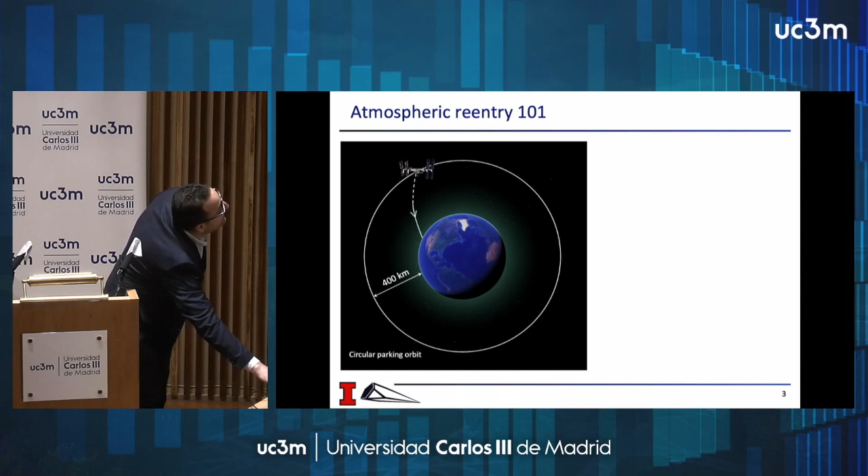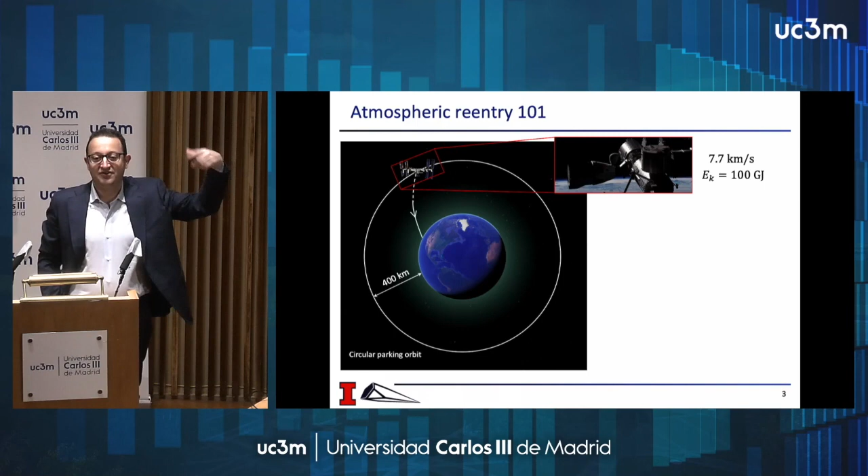So we start from here, right? From the International Space Station, at about 400 kilometers altitude above the surface of the Earth. And we have a system in orbit. Imagine that this orbits at the first cosmic velocity, 7.7 kilometers per second. So if you take the kinetic energy, it's about 100 gigajoules. And a few minutes after, you want to land on the ground, where of course the kinetic energy is 0 and the velocity is 0. Otherwise, if you carry astronauts, you run into a lot of trouble. You can also land with an impact velocity, but it's not advisable when you're carrying a crew.

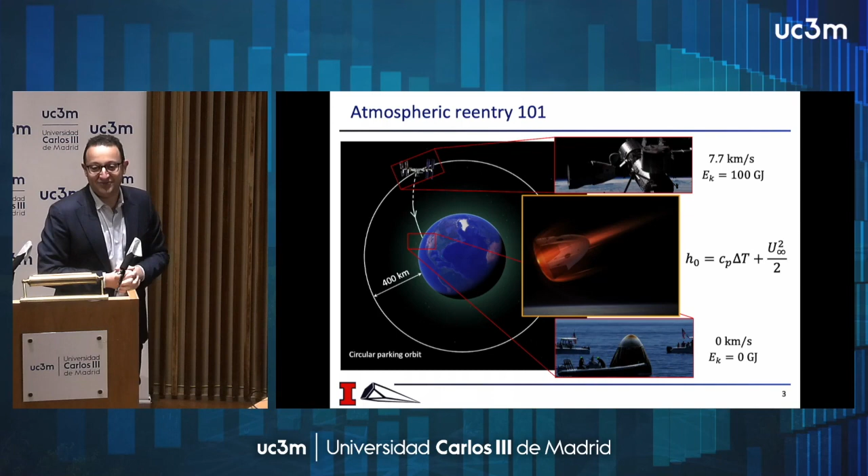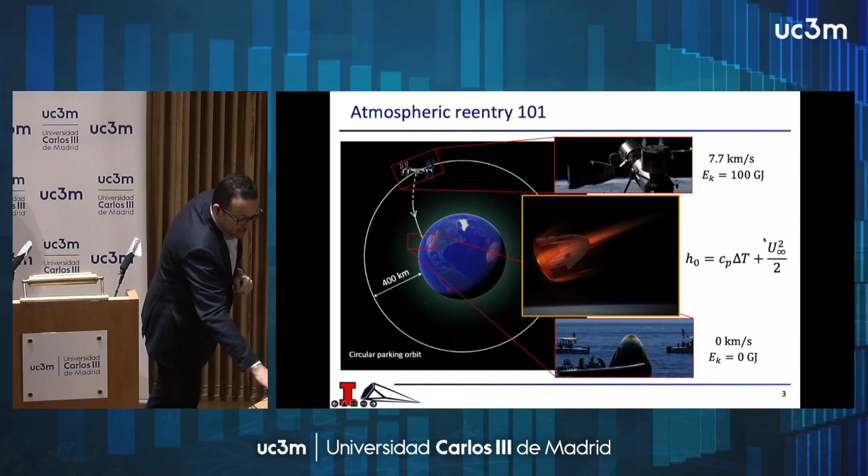So the question is, what happens to all this kinetic energy? Anyone that wants to try? This kinetic energy is converted into heat, right? And so, this is stagnation enthalpy, Cp dT plus U infinity squared divided by 2. And in fact, you see that you need to dissipate a big portion of this kinetic energy into heat. How bad is this? Well, this is quite bad because the heat transfer, in fact, scales with the cube of the velocity.

So if you take the amount of heat that needs to be dissipated, this is probably the heat that you need to warm up or cool down your house, like during summer, in about 1,000 years, right? So in 3 minutes or in 10 minutes, this is kind of the amount of energy that you need to dissipate. So now you know that in this scenario, the system re-enters at hypersonic speed. The flow crosses a very strong shock, and most of the heat is being dissipated in the flow. But there is still a portion of this amount of heat that reaches the surface.

And this is about 1% of the total heating, and this 1% is still very high. Just to give you an example, we're talking about 75 watts per centimeter square of heat flux to the surface for the space shuttle. I put Mars 2020, which is another type of system that we care about. Apollo, when you are talking about high-speed entry from the moon, about 450 watts per centimeter square. And so just to compare with a small toaster or a typical appliance, we are about a factor 10 to the power of 3 difference between the two.

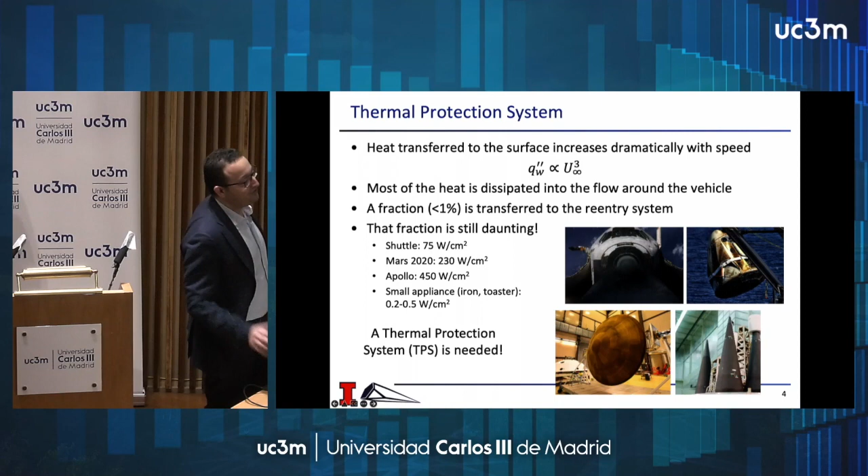Anyway, this is just to tell you that what we need is a thermal protection system, and this is what this talk is going to focus on, some investigations that we are doing in this area. You see many of the systems that we work on and we care about. Those are systems that NASA uses to bring astronauts back from the space station or to land robotic missions to the surface of Mars. You can also take a typical NASA spacecraft, turn it around, and then you have a system that looks like this one that is used in national security, but those also carry a thermal protection system.

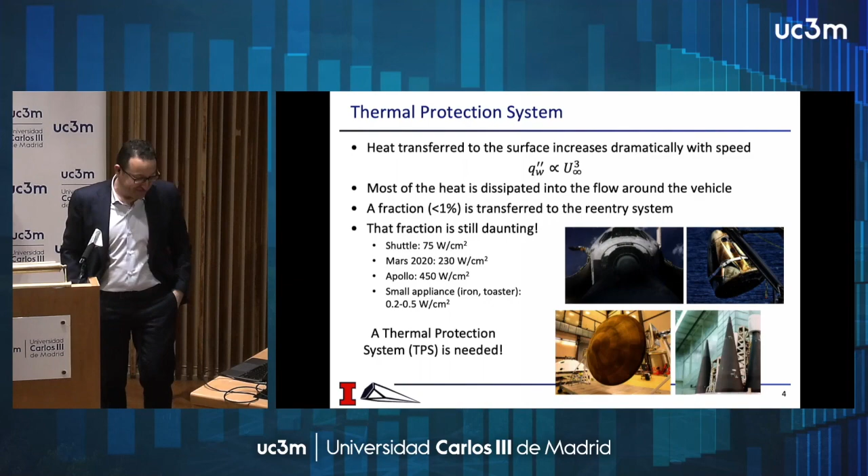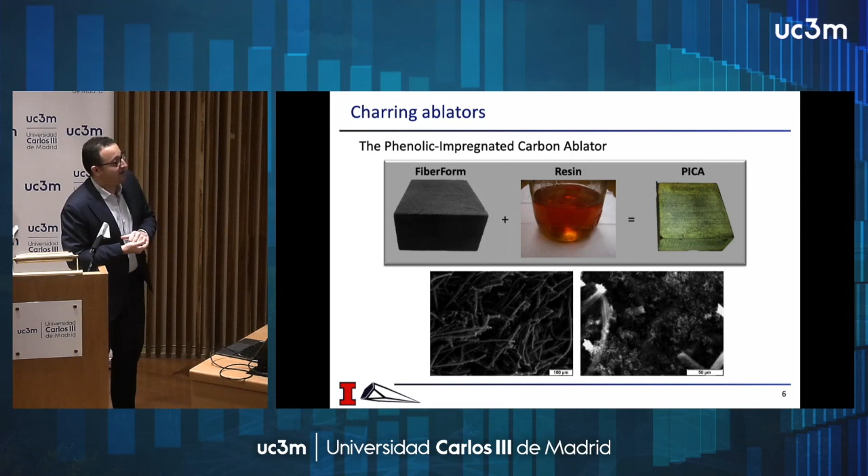The material that I'm going to talk about is called the phenolic impregnated carbon ablator, or PICA. This is the main material used by NASA for this type of mission. It's the one that was used in Mars Science Laboratory, in Mars 2020, and is used also for the next mission to Titan, which is called Dragonfly, to deliver an octocopter. So it's the main technology that NASA has developed in this area. You see here some examples where it was used.

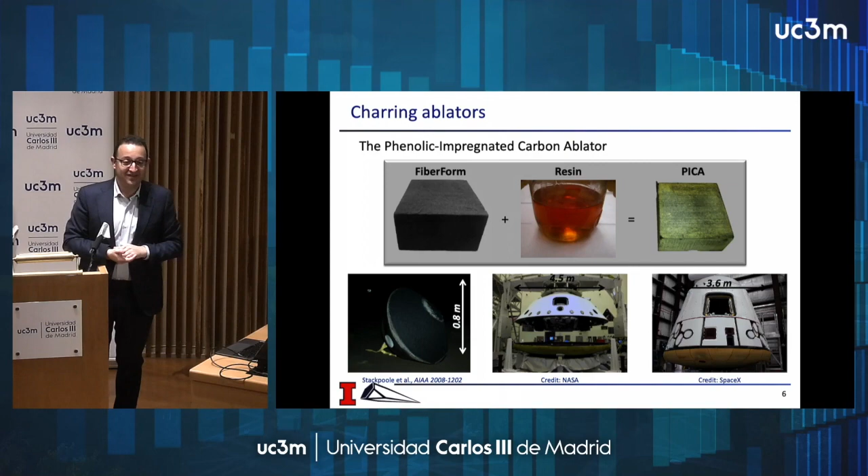The one on the left-hand side is the Stardust sample return capsule. In fact, it's the fastest man-made object ever to re-enter Earth. Its velocity was 12 kilometers per second, so heating is particularly high.

All right. I have one last introduction slide here, which is how does an ablator work, and how do we study it? Well, you see that it is quite a multi-physics type of environment, right? You have the decomposition of the phenolic resin that produces a blowback of gases through the material. Remember that this is a very highly porous medium made of about 90% air or voids, where the gases are traveling.

Of course, there is heat transfer. There is transport of gases inside the porous medium, and most of the action really happens very close to the surface, where, if we are entering Earth, we have a lot of oxygen, and the oxygen interacts with the carbon fiber and gasifies the carbon, right?

So for those of you that like chemistry, I'm not one of those, but I need to deal with it. So you have carbon that reacts with O2 and forms CO2, or carbon that reacts with oxygen and forms CO. So you have solid carbon that gets depleted into a gas. So that's really the essence of the ablation phenomenon: what determines the material to recess, the material to decompose, and that's actually the material to dissipate heat.

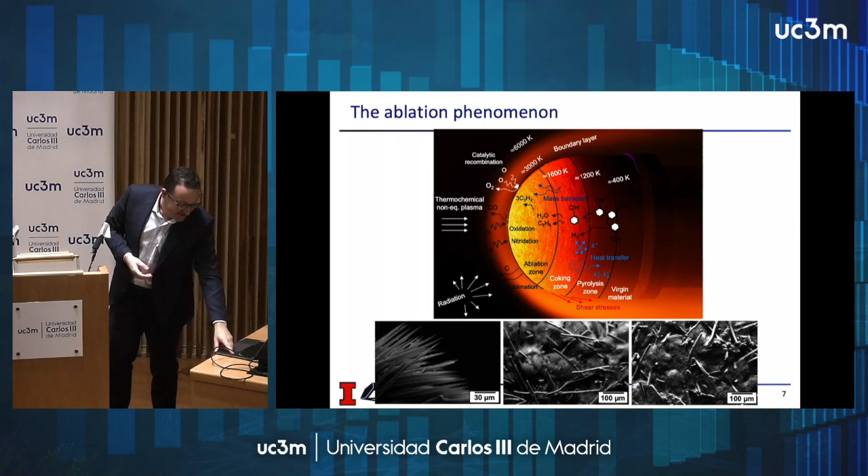Well, the point that I want to make across today is that all these phenomena that you see there, and all these multiphysics effects, are driven by the way the microstructure is architected. So by the way the fibers are organized in space, by the way the resin is arranged in between the fiber. That is what I mean by microscale effect, and I'll talk about it a little bit more.

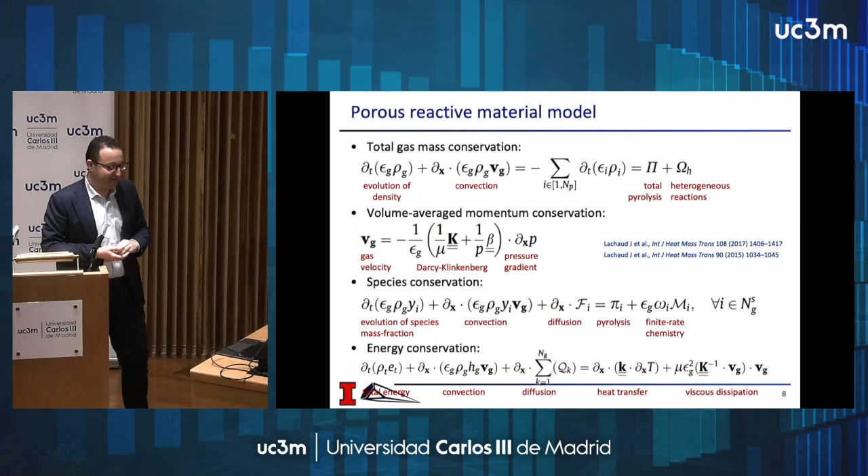So, for those of you who are familiar with fluids, I'm not pretending to go through the entire equation set here. How do we model this material? In fact, we solve Navier-Stokes combined with heat transfer and combined with pyrolysis, the decomposition. So this is one of the most updated models to solve this. So what I want to talk about is how the microstructure actually affects the way we model this material, and how we can do experiments to understand this microstructure.

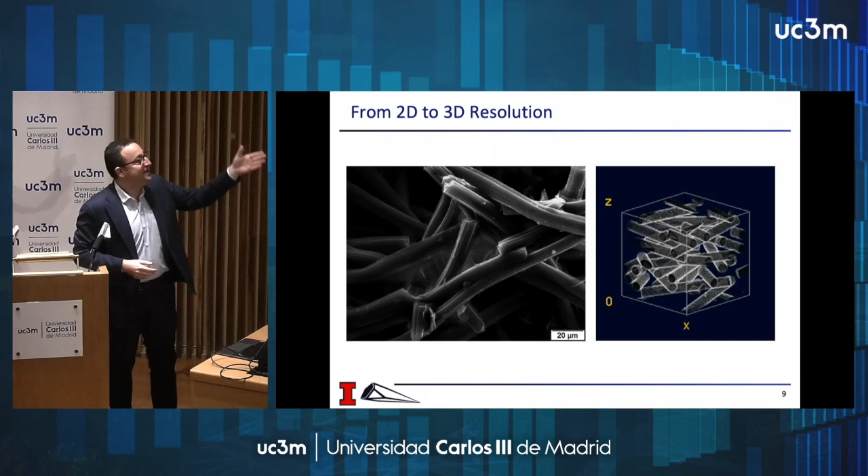So you see here on the left-hand side, this is a scanning electron micrograph, so it's a 2D image of the three-dimensional material architecture. A few years ago, when we were trying to model this material, we were using what I call the poor man's representation of this. We were taking cylinders and putting them in a box, and thinking that this could represent the three-dimensional structure of this porous media. Of course, that's not a very good representation of the architecture, and that's what led us to use X-rays to try to resolve those structures.

The technique that we are using is called X-ray microtomography. Those of you that have done tomographic PIV kind of understand what this is. This is a similar thing applied to material science, and this is what you do in the hospital when you get a CT scan, right? You get onto this table, and you have an X-ray source that rotates about your body and gives you a three-dimensional image of your body. Here we do it the opposite way. We have a steady X-ray source, we turn an object inside, and we get a reconstruction in 3 dimensions of the material. We use a combination of synchrotron and laboratory X-ray sources to do that.

In fact, most of what I'm going to talk about is synchrotron X-ray imaging. Most of the work that we have done in this area is in collaboration with the Advanced Light Source at Lawrence Berkeley National Lab. These are some of our collaborators. Synchrotron light sources are particle accelerators; there are a few in Europe. Think about CERN, right? You have electrons that spin at nearly the speed of light, and when they turn, they produce X-rays. And we use these X-rays to do the imaging that I discussed.

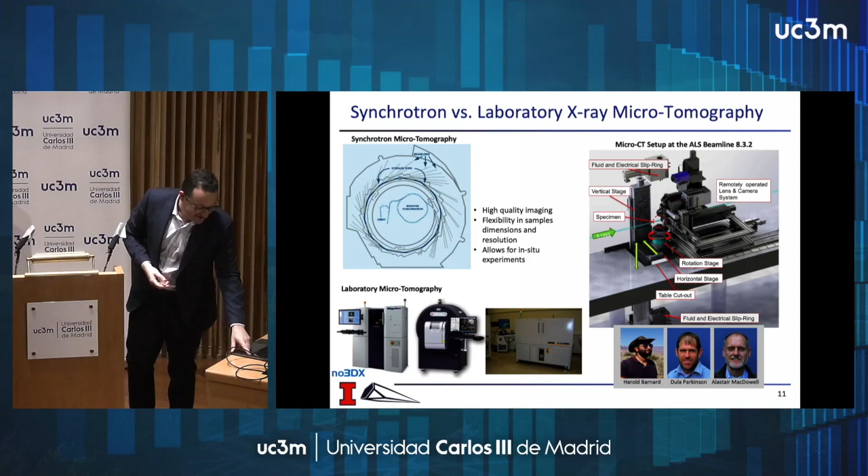So if you apply that to the structure, you get images like the one depicted here, which is a lot better than the box of a few cylinders that we showed before. These three-dimensional images give you a full picture of how the material is architected, how the porous media is organized in space. But they are not only a pretty picture, they are also a description of the material in a three-dimensional grid. And if you have that, then you can use it to do many things. I'm going to give you a few examples, but not go through all of them.

So you can use it to simulate flow transport, so determine material permeability or material tortuosity, and look at how the flow is transported through the pores. You can use it for thermal transport. So the resulting thermal conductivity of these composites is given by the way the fibers are organized, and the thermal conductivity of the fibers plus the thermal conductivity of the gas that is contained in between the fibers, and then you can use it to resolve chemistry.

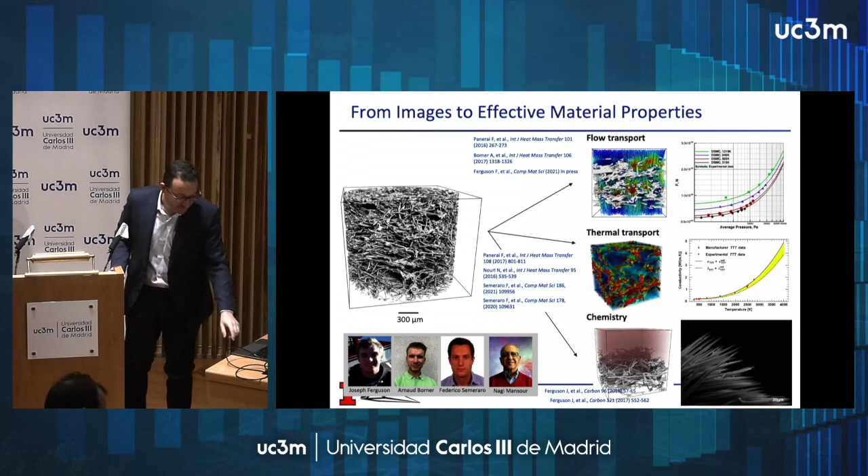So this is a lot of the work that I've been doing in the past with some of my collaborators at NASA, and we are continuing right now. And I'm going to show a few examples of this. So based on these images, we built a model for the oxidation problem that I mentioned earlier, where we can simulate the gasification of carbon based on a particle method.

Okay, so what we do is we take a three-dimensional image. We walk particles inside the porous medium, particles that represent oxygen. These particles would hit the fibers, right, and would take some of the material away. So we simulate diffusion with random walks, and we have a sticking probability model to simulate the removal of carbon. I can give you further details later on if you're interested.

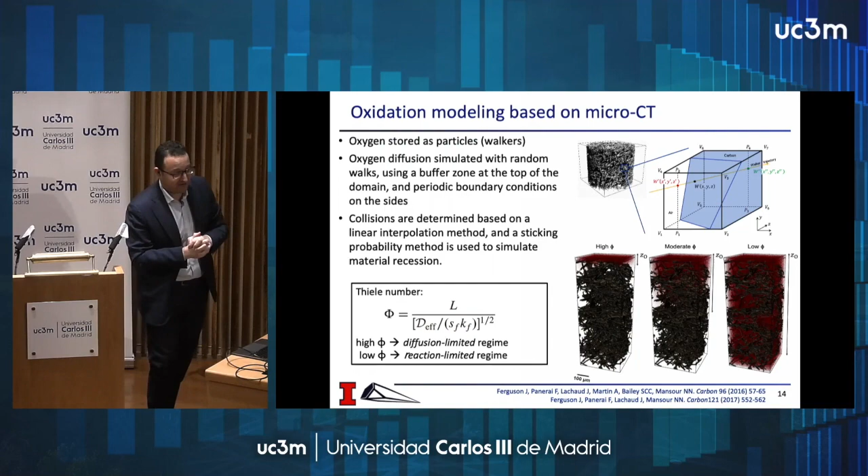So this process is very well explained if you look at a dimensionless number that is called the Thiele number. For those that are familiar with combustion, I don't know if there is anyone working in combustion here. The Thiele number is kind of a Damköhler number. Okay, so it's a contrast between diffusion and reaction. So how fast oxygen can diffuse in the porous medium and how fast the oxygen reacts with the carbon. Okay, so this model can capture the three regimes of carbon oxidation.

So a reaction limited regime is when the reaction is slow, and so the particles can penetrate inside the porous medium and decompose the material in depth. On the other hand, the opposite asymptotic limit is the diffusion limited regime, where instead the oxidation process is very fast, so it happens all at the surface and the material recesses, right? So oxidation is very fast and diffusion is low, and then in reality, you would have probably something in between. Okay, all right. So this is a simulation, yeah.

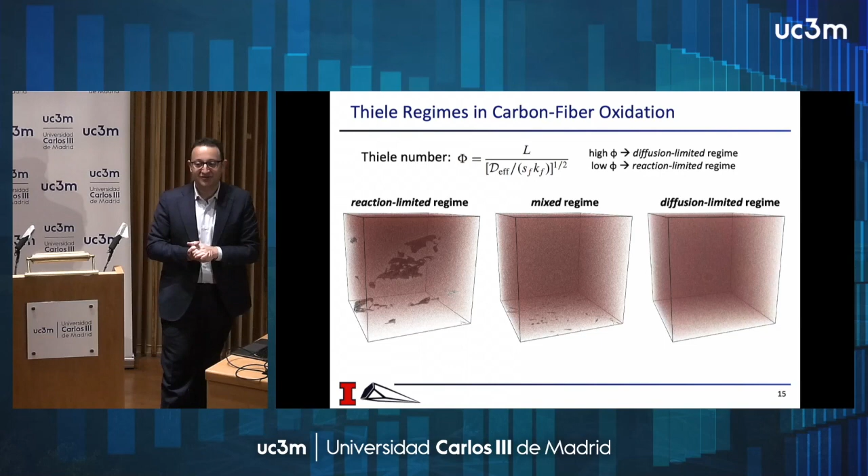So it's taking the real image of the material and applying a model to it. Well, now what I'm going to show you is that it's possible to capture this experimentally, and it's something that we've done about a year ago, and we're still busy processing some of the results. So, of course, we are using X-rays again, but this time, instead of using X-rays only on a static model, we use X-rays in a very fast setup that allows us to capture the dynamics of this decomposition problem.

So we apply what is called environmental X-ray tomography. I'm going to skip here because I'm kind of short on time. And so we did experiments at a light source in Europe. It's called the Swiss Light Source, the TOMCAT setup that they developed. It's basically a fast camera. So it's a camera that streams large amounts of data directly into a server. Each one of these data sets is on the order of several gigabytes, and when you want to resolve it with second-type resolution, you need a particular setup to acquire the data.

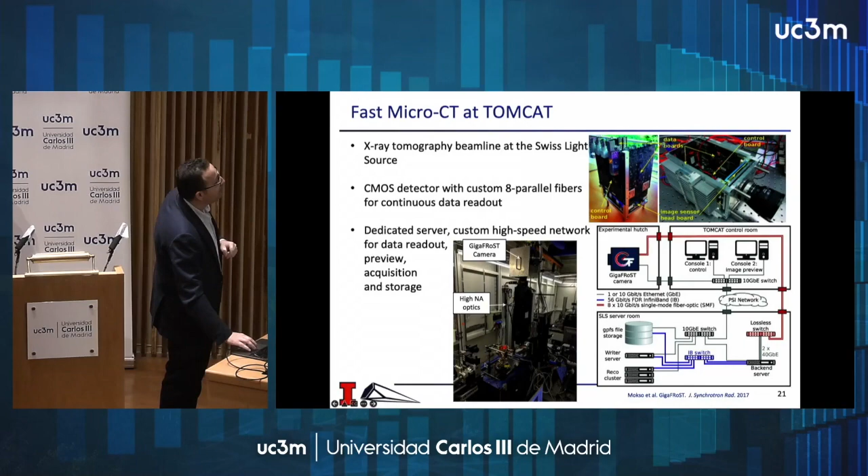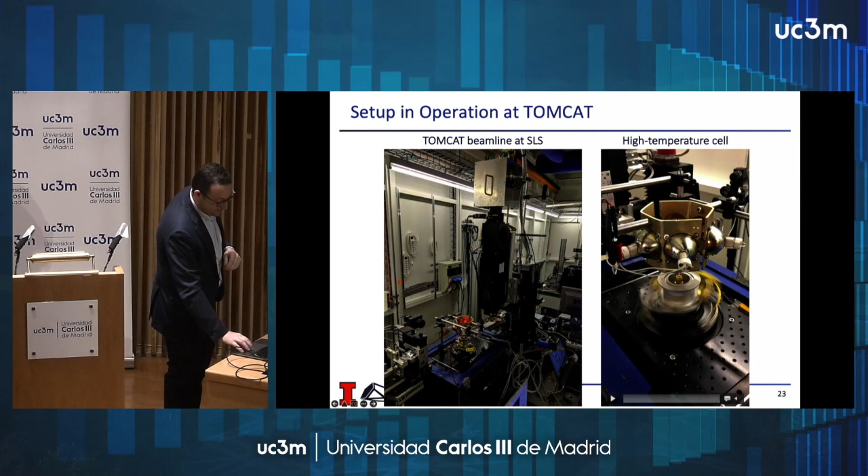So here probably I have, let me see. Oh, I don't have a movie of it. Oh, here I have. So it's a movie of how the setup works. So again, imagine you have X-rays here with some optics that are getting the images, and then inside we put a reactor that simulates the high temperature environment that you have during atmospheric entry. So I'll show you how this works. We use lamps to heat up the material, and then inside we have an oxidation reactor with this porous media.

And with oxygen flowing through this porous medium. So at each rotation that you see here, we get one three-dimensional image of several gigabytes and stream it onto a server. It's pretty amazing.

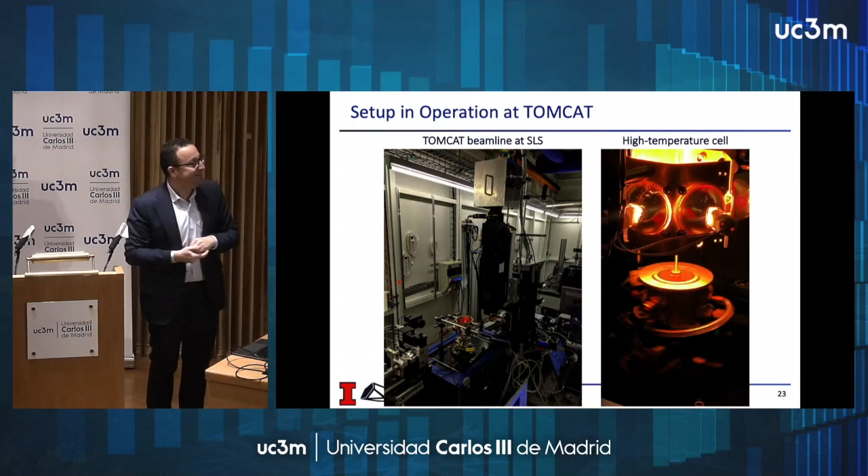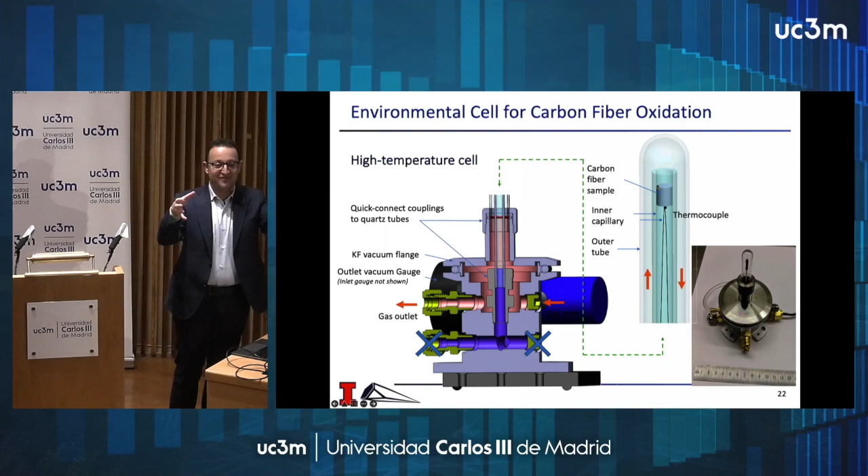So I'm going to go one image back here to explain how this works, how the reactor is made. So we get this porous media here in the middle, right? So we flow oxygen, and then this is in the focal spot of these lamps that provide the heating. So if we do that, this is what we obtain, and this is a bit dark, so I hope this is what we obtain. So we can watch. This is a little bit slowed down compared to how it works in reality. So we can fully resolve in 4D how the material decomposes under the effect of oxygen.

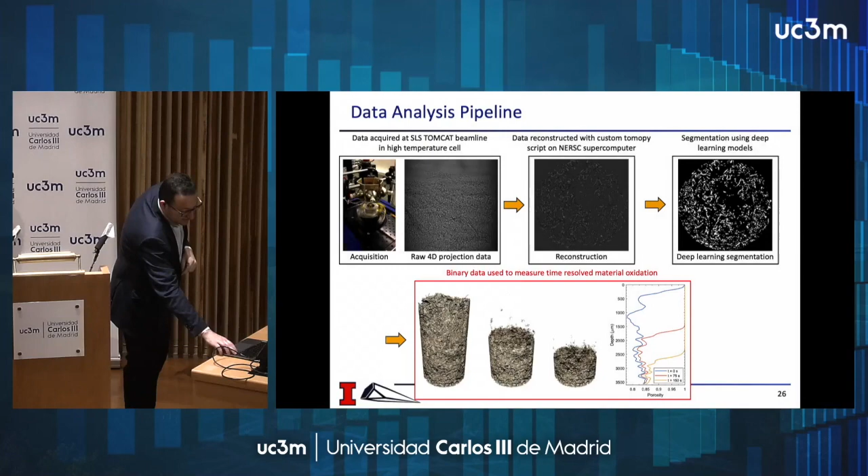It also has a very big significance for atmospheric entry, because if I show this again, and if you think about this in terms of actual hypersonic flight, the part on the right is when you are at high temperature, and the part on the left is when you are at low temperatures, where you would think that you're actually safe. But you see that actually the low temperature regime is where the material decomposes in the interior, and the thermal protection system loses structural strength. And so this is an important finding that we're trying to quantify a little bit better right now.

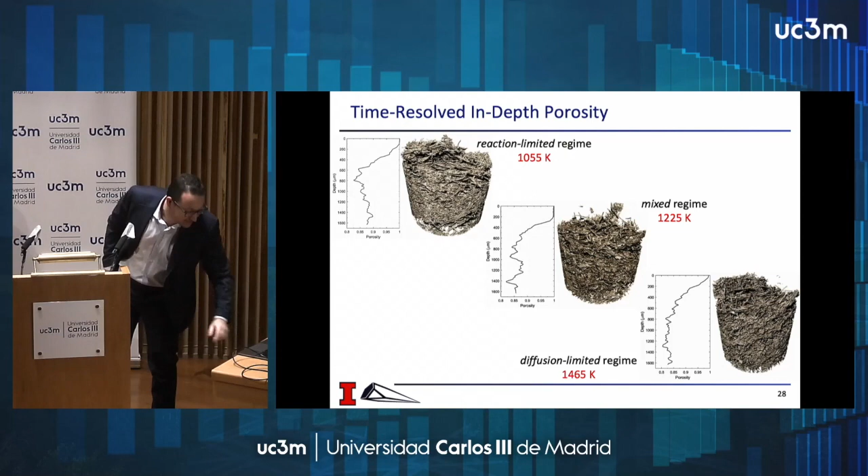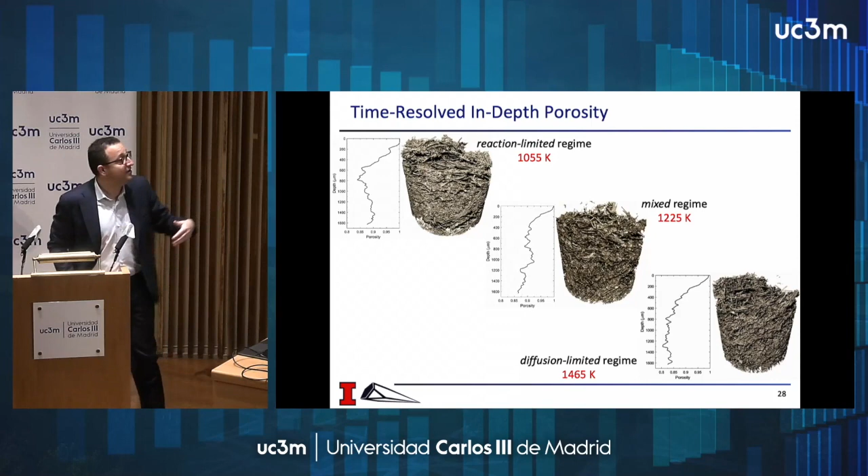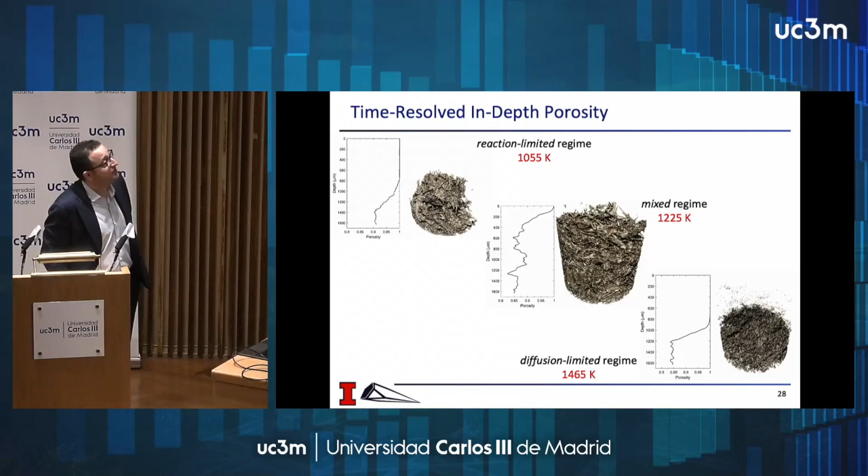So of course you can do a lot more things, and so you can look at the evolution of the porosity of the medium in depth. So again, you see different oxidation penetrations depending on whether you are in the mixed regime or whether you are in the reaction limited or in the diffusion limited regime. All right, so I have one last slide.

Remember at some point I mentioned that we can use these images to compute transport, right? So one of the things that we have is a software that can compute effective thermal conductivity of those materials. So you can take a conductivity for the carbon, take conductivity for the gas that is inside, and use the organization of the material architecture in 3 dimensions to get an effective thermal conductivity of the material.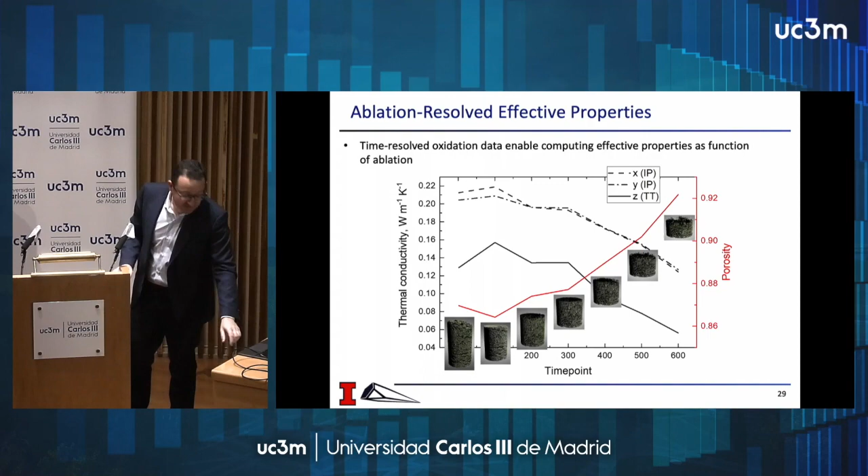So I skipped a lot of details, and I'll be happy to take questions. What I want to do is actually to jump to the conclusion. So I hope in a few slides I convinced you that we can really use 3D, or actually really 4D imaging, to resolve the dynamics of material at high temperatures. Since there is a prime effort here in fluids, there are a lot of opportunities also to resolve the fluid mechanics inside this media in 4 dimensions, and so it's a powerful tool that really allows us to understand how this material behaves under actual atmospheric reentry.

So I'm going to leave it here, and I'll be happy to take any question.